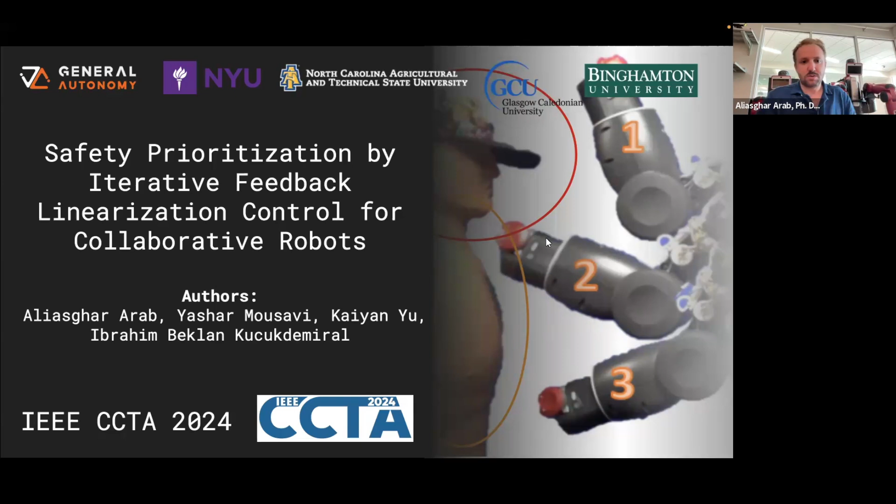This research is about how to prioritize robot motion around humans based on the most critical point of the body. So if the robot is moving around the head or around the body, the robot should understand that and should address that accordingly. We proposed a new method and we will be discussing it in this presentation.

So why do we need more advanced control systems? The reason is we are increasing the use of collaborative robots, and the number of robots working around humans is increasing every day. You can see people's heads and hands are very close to the robot when they are working with them in the industrial environment, or even less industrial environments like a research lab or a medical or biomedical lab. So this understanding of the self and the other for the robot is very important.

I think the understanding of the self is where the body of the robot is, like each joint and each part of the arm. That is feasible through understanding the joint angles, but understanding the human presence and an accurate and precise human body is also very important to make the robot work efficiently and smoothly around humans in a collaborative work environment.

So when a robot is working around a human, it's very important to understand where the most critical parts of the body are, like the head or even the eye or other parts. This paper is only prioritizing the head over the rest of the body, and the head is getting the highest priority. So when the robot is moving around the head, it will keep more cautious constraints. And also the robot should move smoothly around humans to give both physical and psychological safety; when a robot has an aggressive motion around the human body, psychological safety is affected.

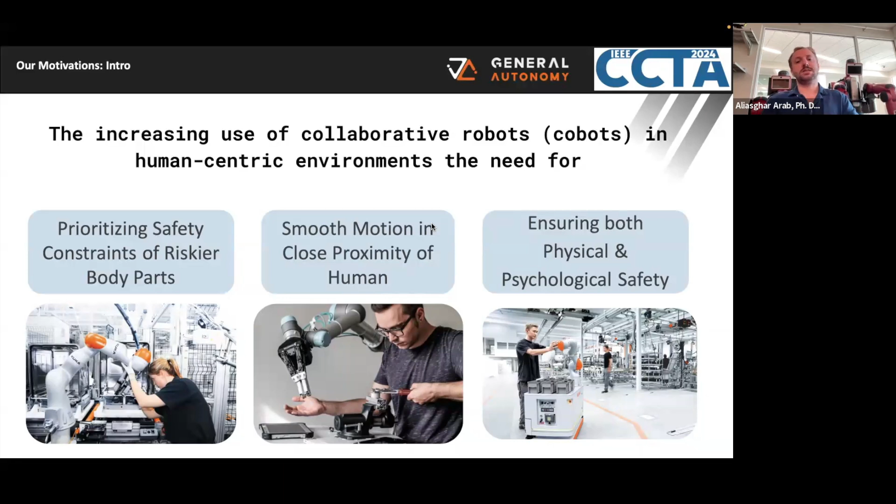So this controller is using iterative feedback linearization, integrating it with nonlinear model predictive control, and defines safety prioritization to make smooth and safe motion around the human body. A novel approach is necessary because existing methods are limited. Some of them, like control barrier functions and nonlinear model predictive control, have proved that they are able to address safety, but addressing both safety and smoothness and how to prioritize them is still an open question, and recent research is working around it.

Feedback linearization is a very strong tool in terms of giving you the capability to adjust the controller, because it brings the output into a linear format with KP, KD, like the PID gains. We can adjust them to adjust the performance of the system. So it's good to bring the system into that format, but not all systems are feedback linearizable, of course. So we only put feedback linearization as a constraint in our model predictive control instead of trying to feedback linearize the controller, and we integrate the safety prioritization into the constraints of our model predictive controller.

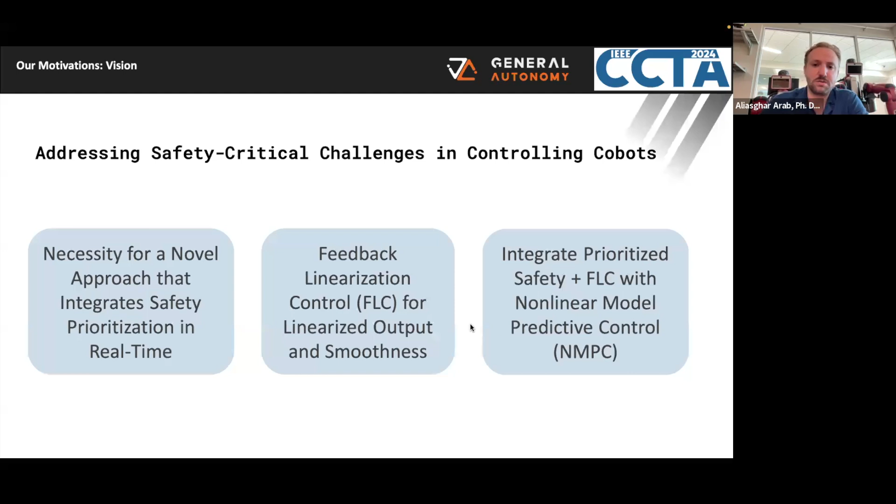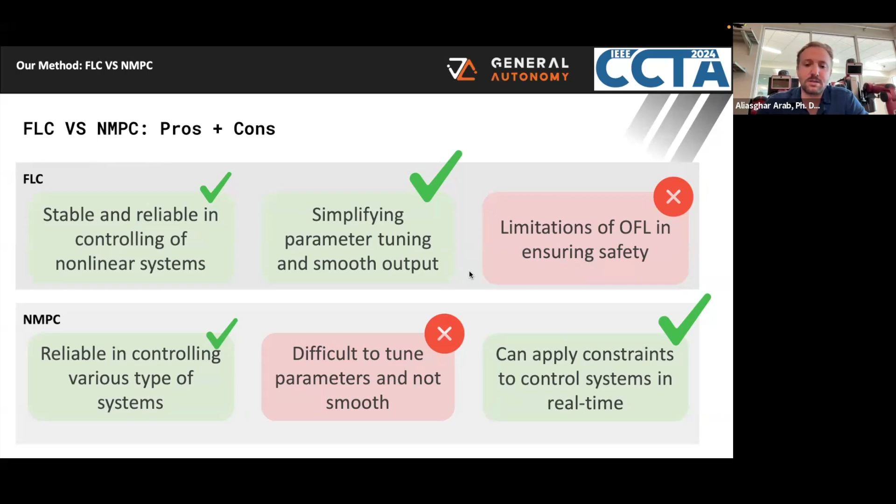And feedback linearization cannot address constraints, so it's not a popular method for safety-critical systems when we have to address constraints, but NMPC, because of using nonlinear programming in real time, is capable of addressing the constraints. By combining these two methods, we can take advantage of simplified parameter tuning and also add constraints to the control system.

So to formulate the problem with a basic definition, we have a nonlinear system, x dot equals f(x, u). X is the state of the system. Any states can be here, like the joints of the robot or the distance from the robot to the human; all these can go into the state of the system, depending on how granular we want to get. The output is the robot's end effector, and we want to control the system so that all the states of the system, the robot's joints and the relative distance of the robot to the human body, are in the safe set.

We might be able to go from only stable region, but not safe area. So the area around the non-safe area, we call it cautious. So if the robot is entering that area, it is going to exit that area before entering the unsafe region. So we have to prioritize the robot motion to avoid cautious.

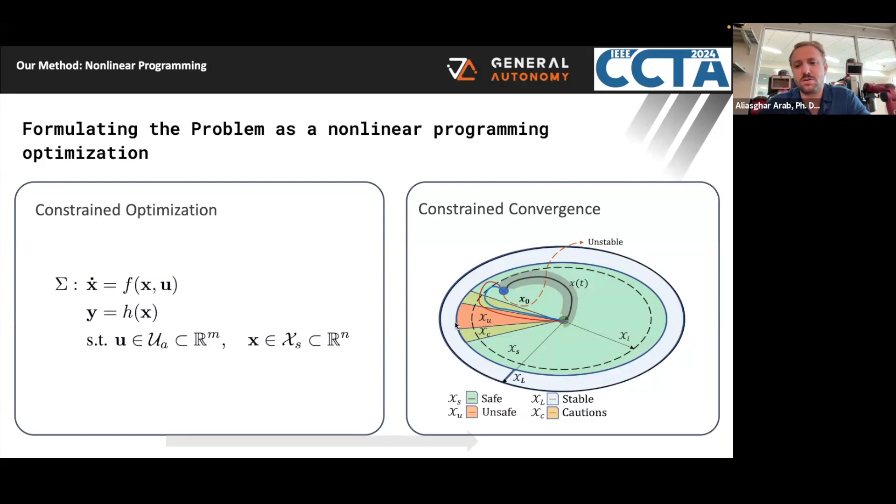So if the robot enters the cautious area, we will try to move out. And the unsafe region is a completely avoided area, even if the robot is not going to get to the target and we cannot find a safe trajectory.

A very high level architecture of the controller: we have the safety requirements, like the robot not hitting the human head. If the robot hits the human body, it should be with very controlled force and no injury. And the requirements are defined as constraints. We have the initial path of the robot through the planner. The planner gives the trajectory to the controller. The controller has the state of the system.

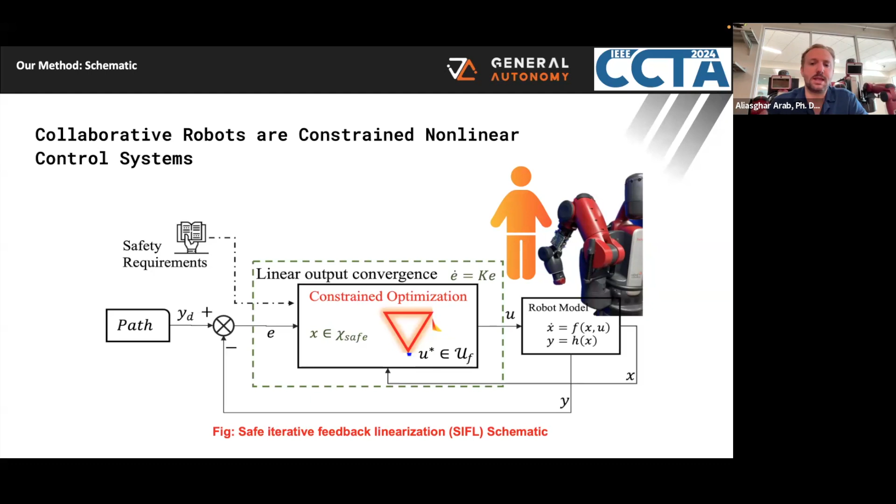And the nonlinear programming of the nonlinear model predictive control system has both the robot's model and some predictive models for human motion. In the formulation of this problem, we have the objective function, with the feedback linearized output as a constraint. So we want to make sure the output of the robot is linearized, which gives smoothness to the robot behavior. And we optimize the gains for that linearized output, which is kx.

And we want to get the highest performance by that optimization, while also checking that the robot will not enter the unsafe region. The safety set is the area where all the safety constraints are met. So we have to make sure we are getting to the set where all the safety constraints are satisfied.

And if any of them are not going to be satisfied, the lowest priority should be the one that is dropped from our safety list. The top priority ones will not be sacrificed in any situation. Each safety constraint is defined by a barrier function B, and by adding all these functions together and putting a weight on them, we can prioritize them.

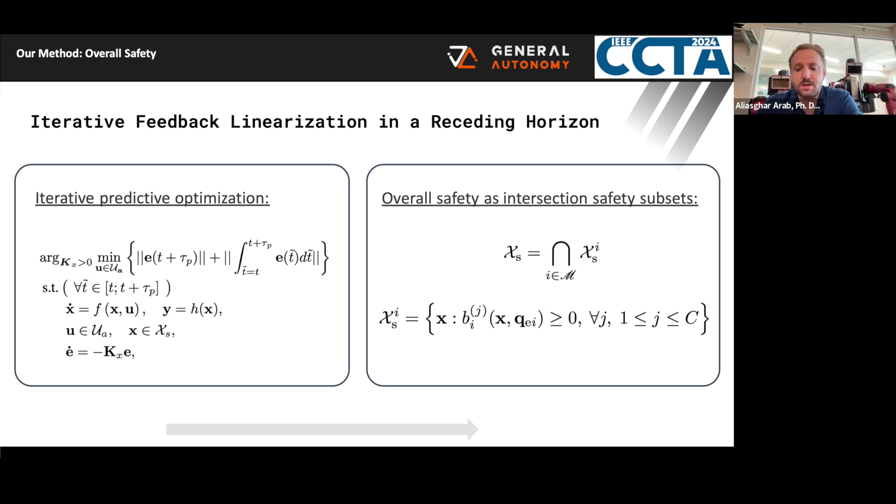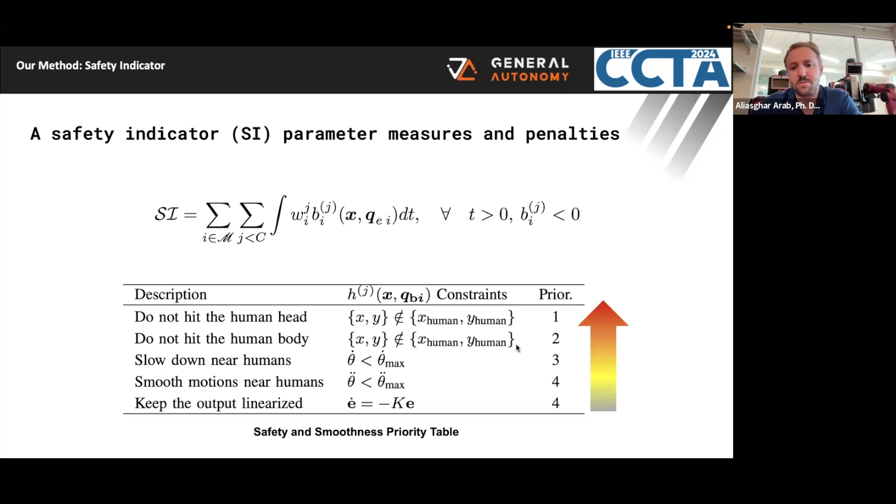And this table shows the priority. Priority 1 is the priority that shouldn't be sacrificed at all. Priority 2, there is a chance, but it should be controlled. And priorities 3 and 4 might be sacrificed in certain scenarios.

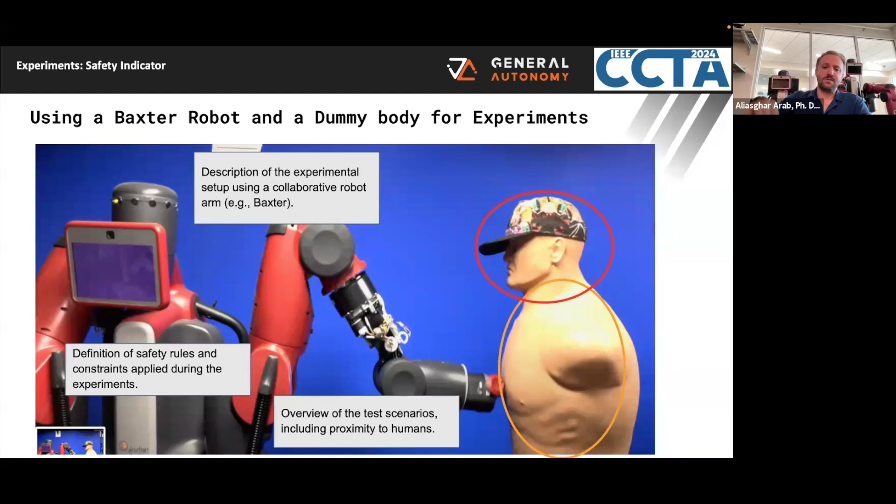And this is a picture showing the robot moving around the human body, one of the Baxter collaborative robots in our private research lab in New Jersey. We only programmed the robot to move 2 joints for this experiment, to simplify the problem. The robot will only move the arm, and the target is to move it from the top of the head to the bottom of the head, making sure there is no contact around the head, and if there is contact around the body, it is a smooth contact.

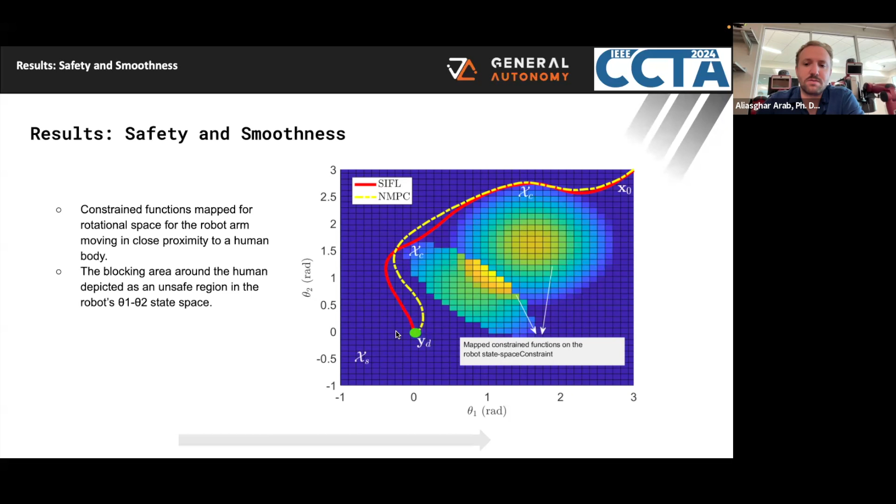By comparing the linearity of the output, which is our definition of smoothness, and the safety indicator value, we can compare our safe iterative feedback linearization with safe NMPC and a simple control barrier function method without any prioritization. So we could see that our proposed method gets a higher safety indicator value compared to the other methods and still gets smooth output.

The convergence time for all of them is similar because they have to solve the nonlinear programming in real time. However, feedback linearization control is not capable of solving nonlinear programs, so that's why it's not applicable. Feedback linearization control might hit the human body in any scenario, unless the human body is not in that region.

And we can see the NMPC has higher velocity motion compared to safe iterative feedback linearization. The convergence time for both is very similar, even though the NMPC gets faster motions. But it means that we have more aggressive motion around humans.

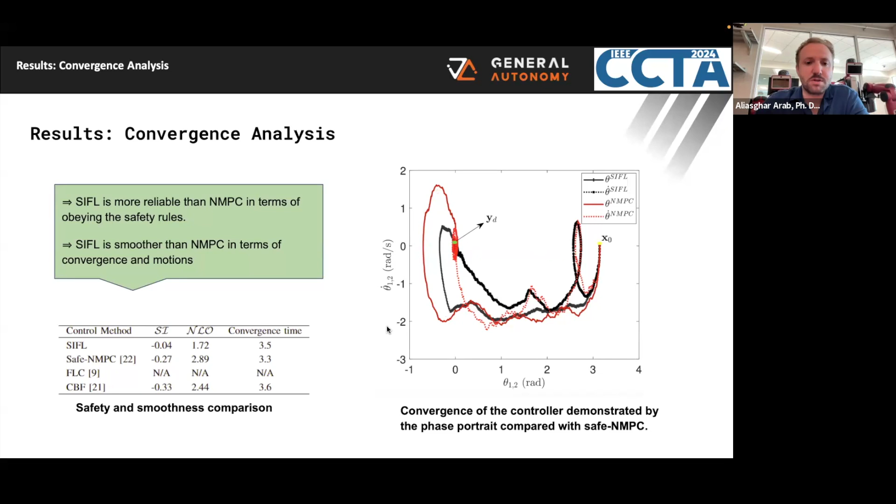We introduced a feedback linearization technique combined with NMPC. Instead of linearizing the nonlinear system, we added the feedback linearization as a constraint in NMPC. And we defined safety indicators and a linearized output indicator to measure the safety and smoothness of the robot.

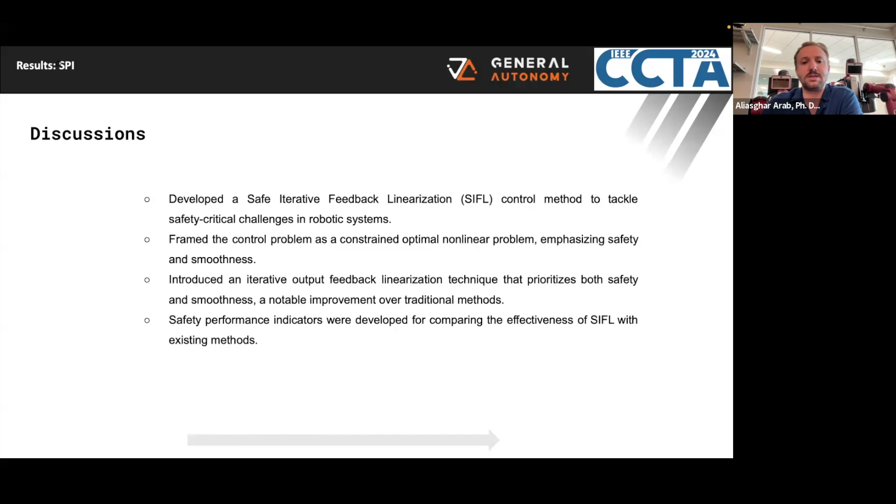As a conclusion and future work, this method can be implemented on various types of systems, even non-holonomic systems or non-affine systems, since we are putting the linearized output as a constraint in the nonlinear model predictive controller. So that gives us an advantage over just linearizing nonlinear control systems, because for a non-affine system, we cannot easily linearize the system.

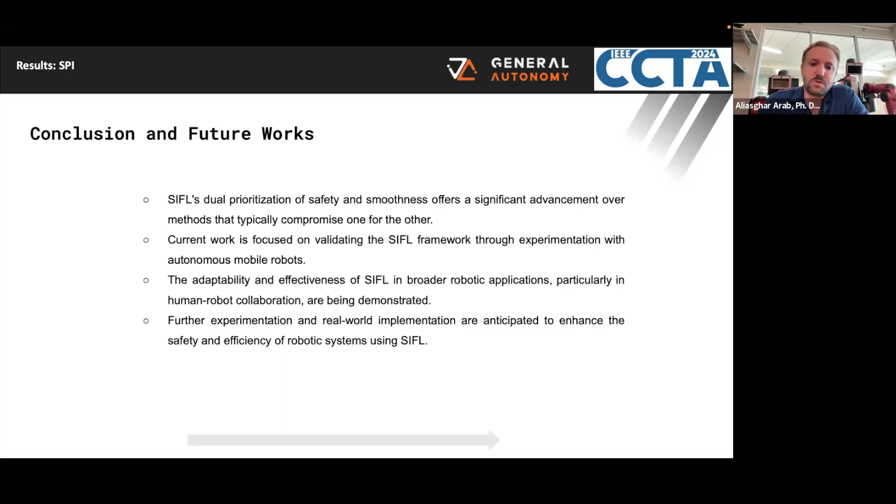And in our future work, we want to test a similar method on other types of robotic systems.